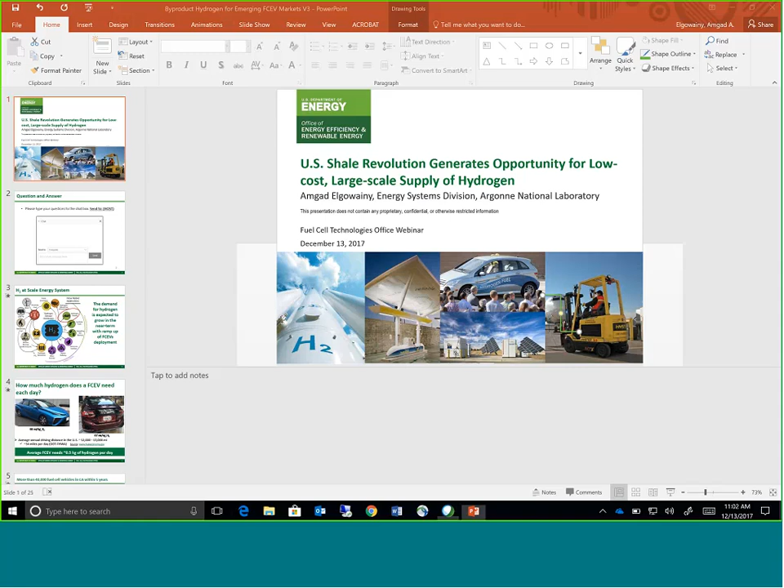All right, take it away, Amgad. Thank you, Neha, and thank you, Eric. Should I share my screen? Yes, go ahead. Can you see my screen now? Yep, go ahead.

Okay, hello everyone, this is Amgad Elgowainy. Today my presentation is about a near-term opportunity for low-cost hydrogen that could serve the early market demands of hydrogen. In particular, I will focus on the emerging demand of fuel cell electric vehicles.

To put it in context, I'm not sure if some of you have heard before about the H2 at Scale initiative. Dr. Bryan Pivovar a year ago presented in this webinar the Hydrogen at Scale initiative and the concept there. I will provide a brief introduction here, but dive into the topic of the presentation.

Hydrogen at Scale, as you see in this graph, tries to provide synergy across sectors. On the left, you see the power sector, which would be in the future dominated by renewables, but also nuclear power in the U.S. is important, about 20% in the grid mix today. Electrons produced by renewable and nuclear can be used in low temperature or high temperature electrolysis to produce hydrogen molecules, which can then serve different applications.

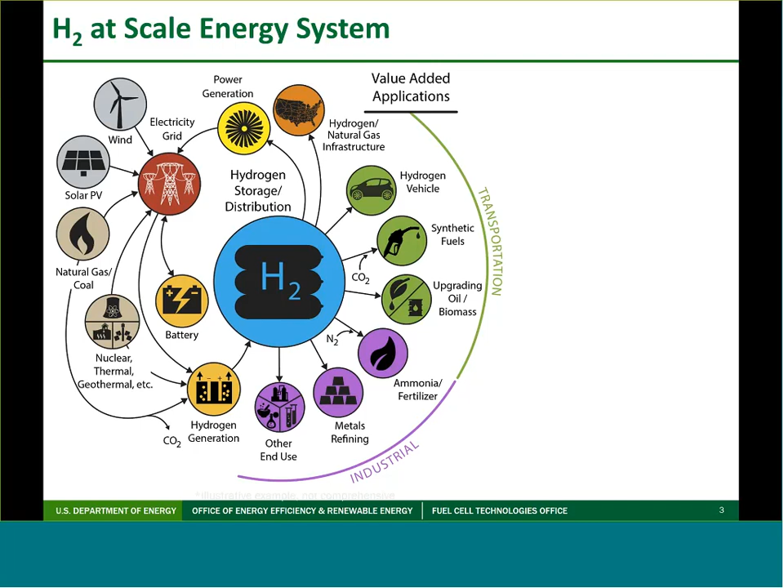So my focus will be on hydrogen fuel cell vehicles. The demand is expected to grow in the near term, especially in California, and then the zero-emission vehicle states in the northeast of the United States. And as the vehicles ramp up, there will be growing demand for the molecule.

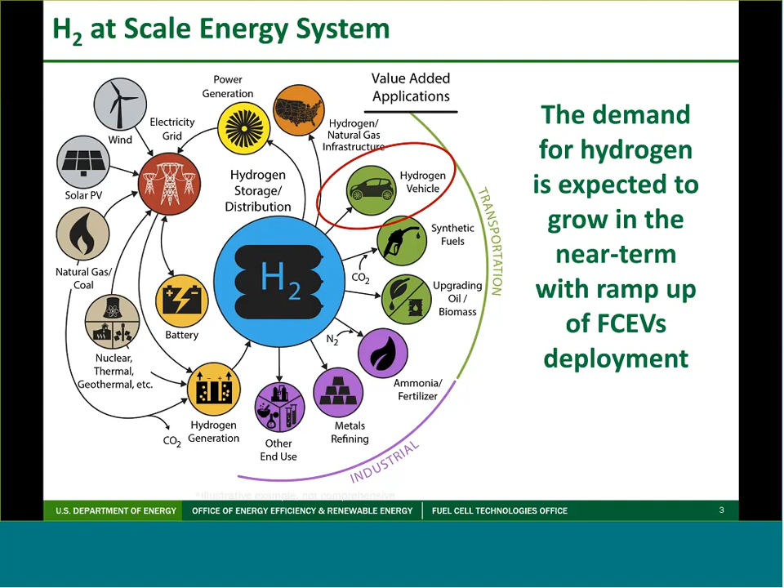Vehicles are being deployed today, and here I put a couple of vehicles that are in the market today. On the left, you see the Toyota Mirai, rated at 66 miles per kilogram of hydrogen in the U.S. driving cycle. On the right, you see the Honda Clarity, rated similarly at 67 miles per kilogram of hydrogen. Typical driving distance in the U.S. annually is somewhere between 12 to 13,000 miles, and on average a driver will drive a vehicle roughly 34 miles a day. Looking at the fuel economy, 34 or 33 miles requires roughly half a kilogram per day.

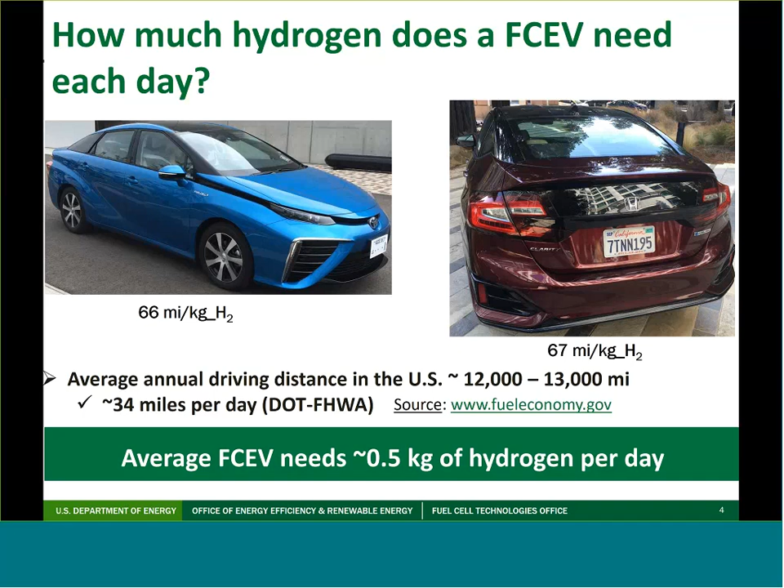So if we understand the market penetration of fuel cell vehicles, we can calculate the market demand for a given vehicle scenario. In California, for example, you will see the projected increase in fuel cell electric vehicle deployment, and within a 5-year time frame, the projection is somewhere between 40 and 50,000 vehicles on the road. Considering half a kilogram per vehicle, then we are talking roughly about 20 to 25 tons per day of hydrogen will be required in California alone within a 5-year time frame.

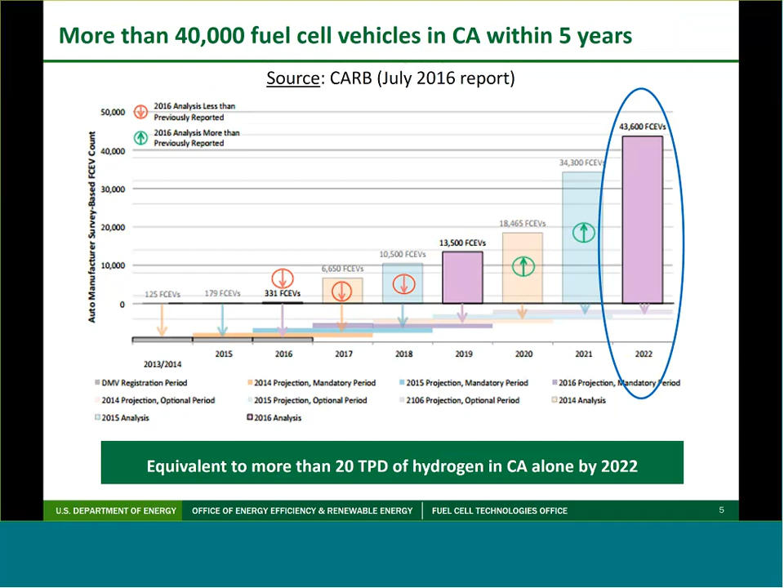This will lead to an important question: where will the hydrogen come from? 20 tons a day in a given market would need to be satisfied with certain conditions. So it is important to understand where the hydrogen will come from and to look at opportunities for a low-cost molecule that will serve that market in the near term.

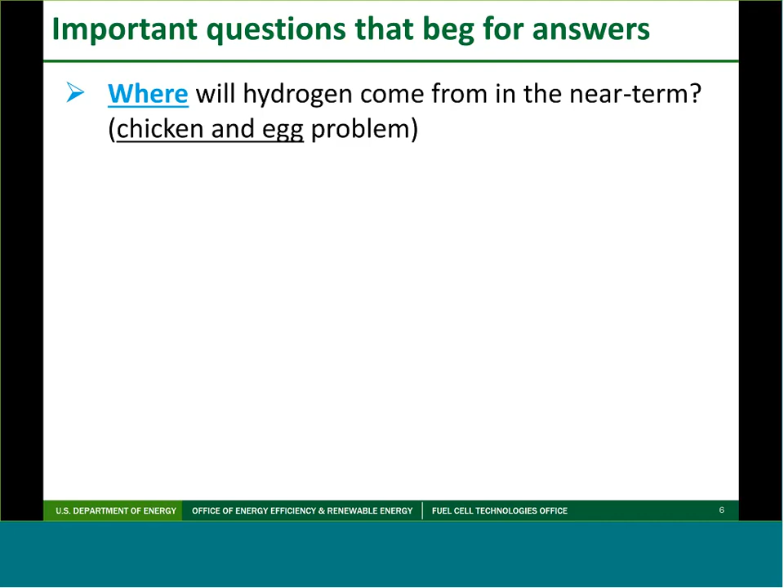The idea is to look for some source of hydrogen that is near term. Of course, we understand that the future is for renewable hydrogen, from zero carbon sources such as solar, wind, and nuclear. But until we get there, and until the economics and market demand grow enough to make these technologies economical, we need something near term today that can serve these markets.

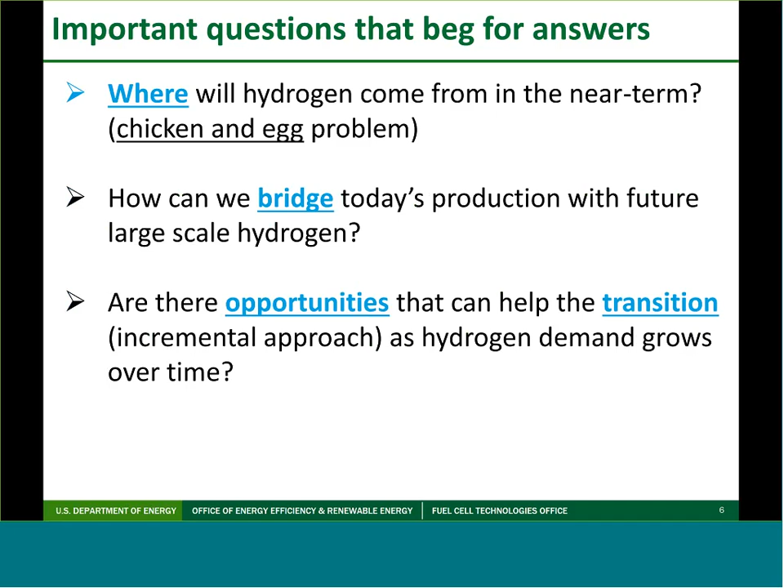So are there opportunities that can help with the transition as we ramp up the demand? This is the question we are trying to answer today, and how this might enable energy security within the United States, and promote hydrogen as an energy carrier, not only to serve the vehicle market, but to serve across sectors.

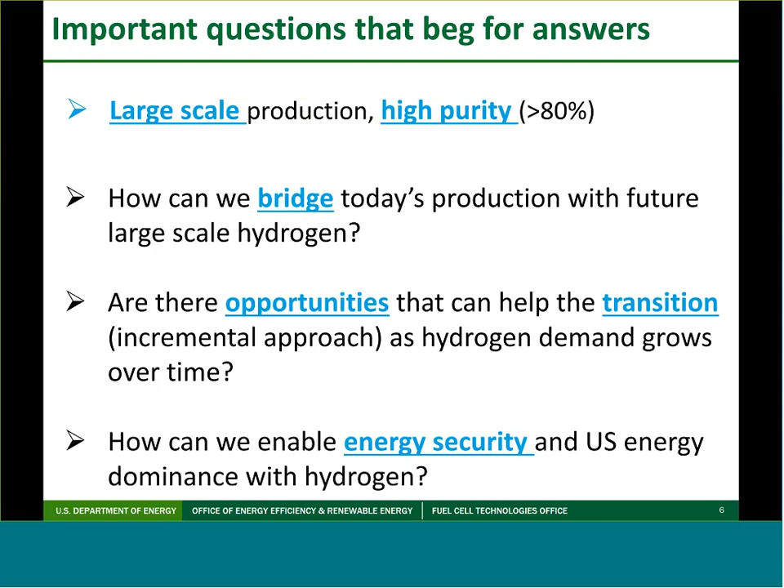So what will be the requirement of a near-term hydrogen supply source? First, we need the scale. We just talked about California, within 5 years, 20 tons a day. We also need the hydrogen to be produced in high purity form, and here I put greater than 80%.

80% is what we get from an SMR before the PSA purification. So if we get that high purity stream, then it will be economic to put a PSA unit to purify the hydrogen and supply hydrogen purity consistent with the requirement of fuel cell electric vehicles.

We also need, in the near term, to avoid large capital investment, to minimize the risk of investment. Lower capital investment would result in lower cost molecules. And we would like to make sure that we can produce a molecule competitive with the SMR cost today.

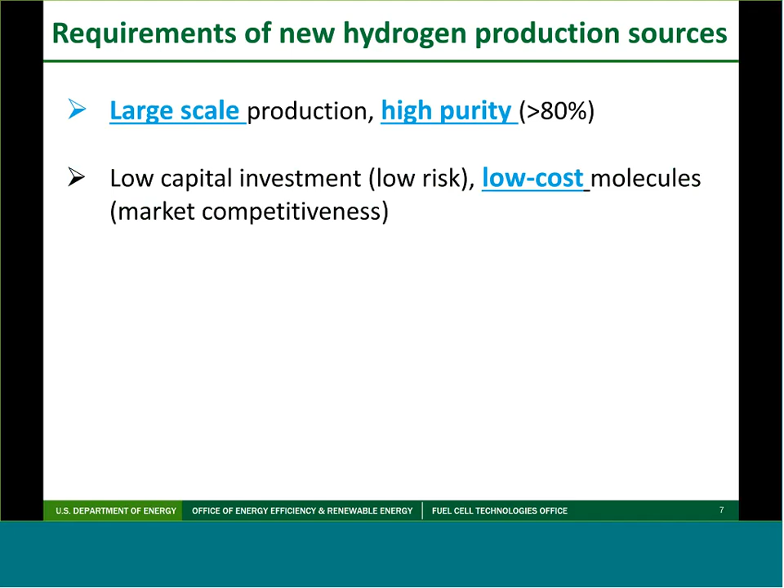We also want the molecule to be near the demand sites, whether it is on the West, California, or the Northeast. So the proximity of supply and demand will minimize the transportation cost.

And finally, we need the molecule at least to be at par with hydrogen from steam methane reforming or better, and therefore we could leverage some of the incentives provided for low carbon hydrogen.

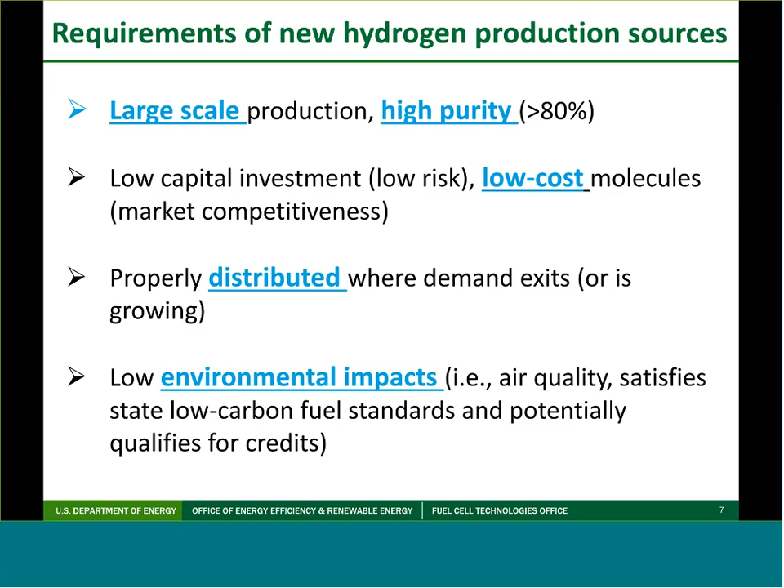So what are our options today to serve the early markets? One option is to build a new SMR plant in anticipation of market growth, and this could be at a large scale, central, or a small scale if the demand is low and localized.

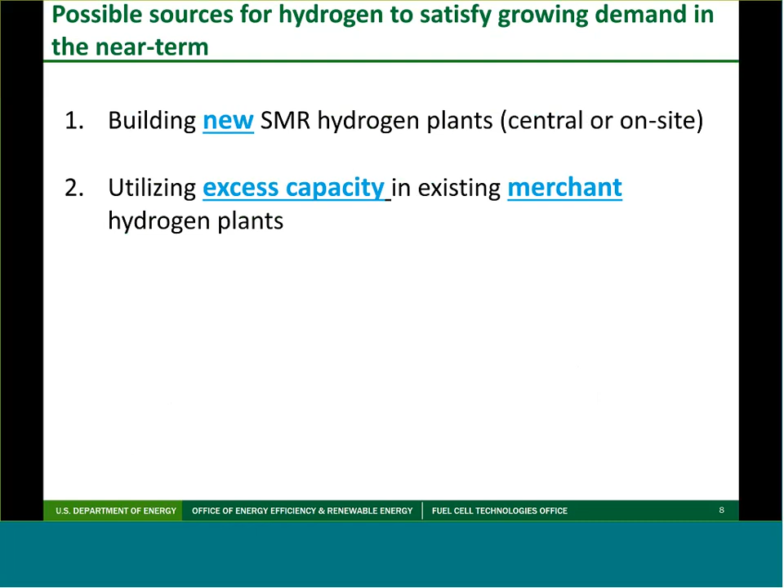Another option is to leverage some of the excess capacity, the marginal capacity existing today that is not being utilized in existing merchant plants across the U.S. We will shed some light on the capacity of these merchant plants, what the excess capacity might amount to, and the potential for that merchant market.

And then really the core of this presentation is to explore the stranded byproduct hydrogen in existing industrial and chemical plants. I will provide some quantitative numbers about the amount and the location of these potential hydrogen supply sources.

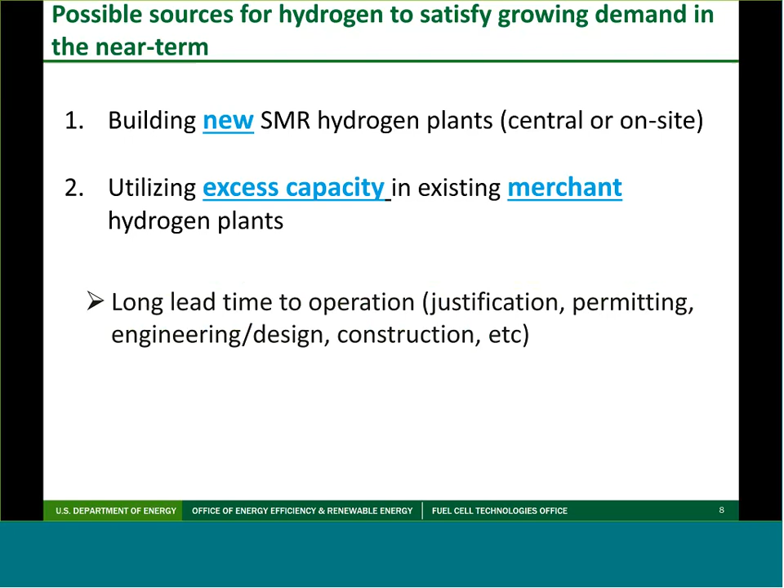So let us first eliminate some of these options. In the near term, building very large SMR plants, 20 to 100 or 200 tons per day, requires significant investments, hundreds of millions of dollars.

And to invest in such a project, you would require significant demand, and also you would like some certainty of the demand and longer-term contracts, which does not exist in the current market in California or other states.

These plants also require long lead time to build and operate, to justify the investment, to get permitting, to design, construct, and put in place. So in the near term, this is not a viable option — and by near term here, I mean the next 5 years, 5 to 10 years.

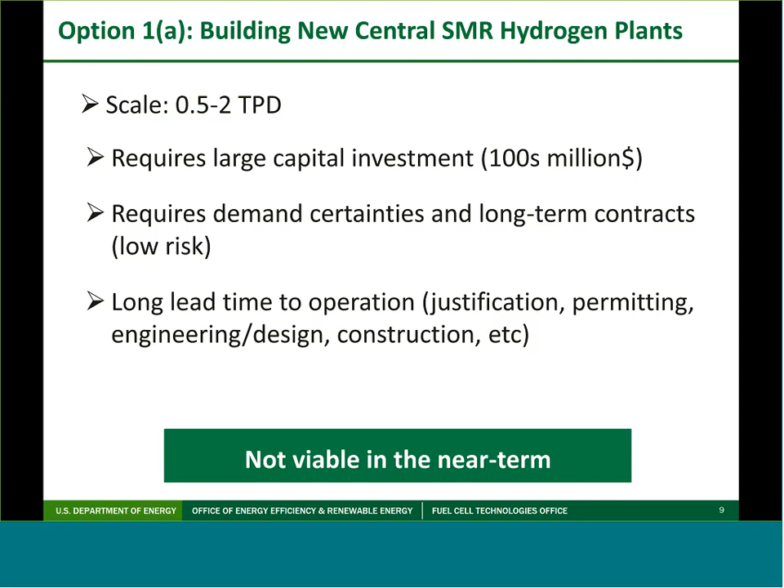So absent a large-scale plant, maybe a good option will be to build a small plant that satisfies local demand — what we call distributed production or on-site production — at a scale consistent with the demand, maybe half a ton a day, maybe 2 tons a day, depending on demand.

This may be appropriate for a fleet operation, for example a fuel cell bus fleet, where you may have consistent demand and you have the land area, and you could depreciate your investment over the service of the buses provided over the years.

However, this might not be as viable for a fuel cell light-duty vehicle market, simply because you shift the burden of capital investment to the station operator, who are usually small investors and risk-averse.

Furthermore, you are adding capital which will be underutilized in the near term, because these stations are not fully utilized as vehicles are being deployed gradually over the years. So the economics will not work.

In addition, you will need significant footprint to install the on-site equipment. You will need purification, you may need power upgrades. And all of these will deter that from being a viable option, absent a few applications, as I mentioned, such as fleet operators.

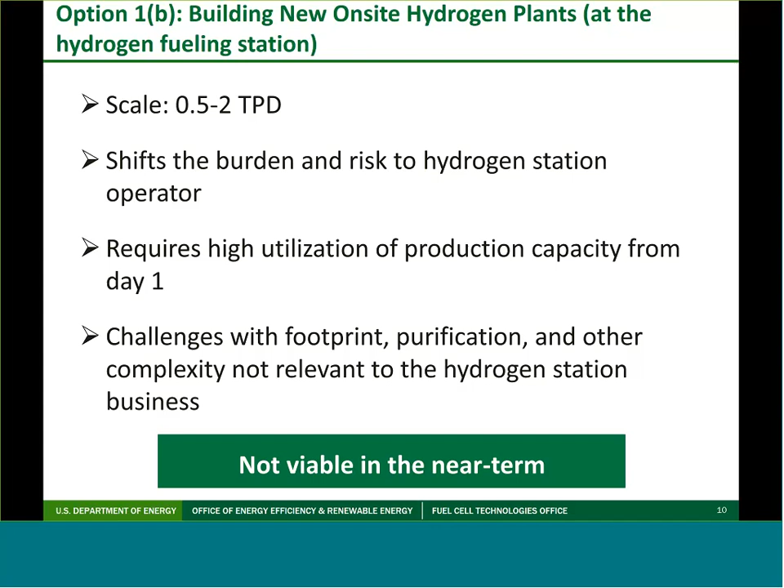So this is of limited viability in the near term as well.

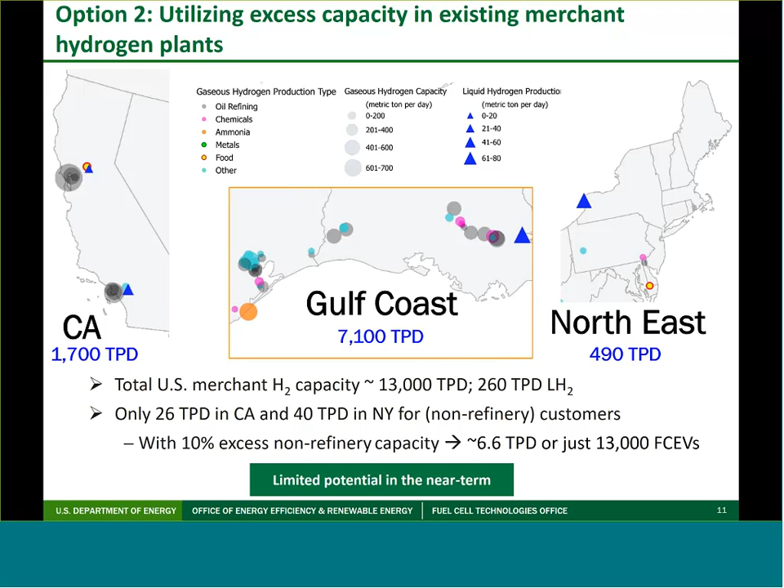So this has limited potential in the near term.

What we are proposing here is that there is significant production of hydrogen that is being stranded in industrial operations. I'll show 2 examples. The first is chlorine plants. Chlorine plants produce roughly 1 million kilograms, or 1,000 tons a day, of hydrogen. This alone can fuel 2 million fuel cell vehicles. Here you see the chloroalkali process, where you use electricity, mainly electrolysis, to separate the chlorine and produce hydrogen.

That hydrogen has several uses. Roughly half of it goes to the merchant market, which is the best use of the hydrogen molecule. In other cases where there's no market, it's combusted for process heat, roughly 30 to 40%. About 10 to 20% is being vented. If we consider 10% vented hydrogen of the 1,000 tons per day, that's about 100 tons per day, which can serve 200,000 fuel cell vehicles in the very near term. This is very high purity hydrogen, roughly 98 to 99% purity.

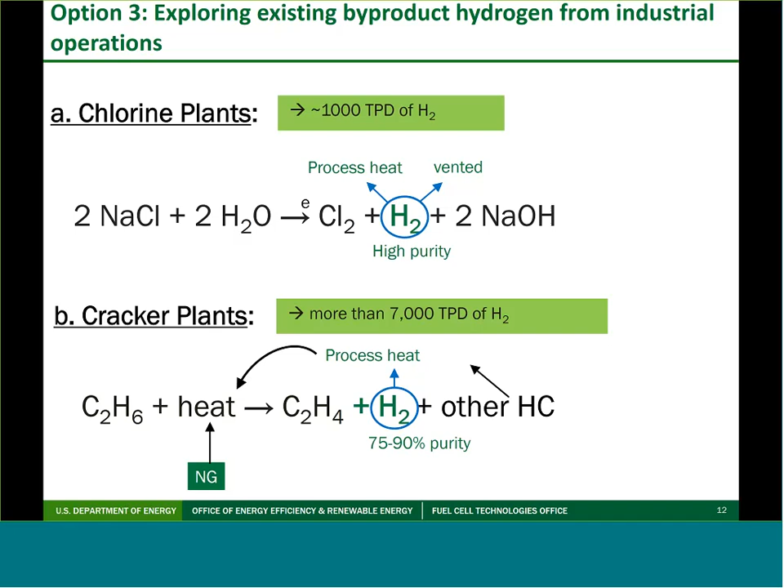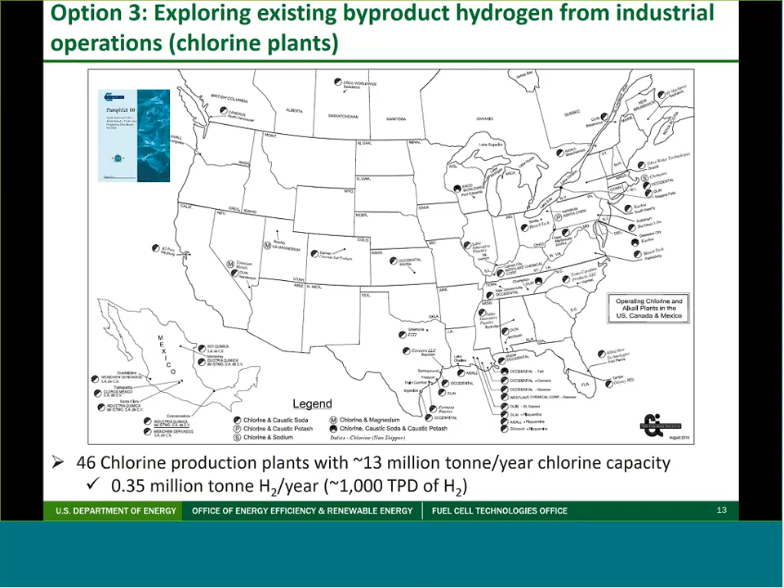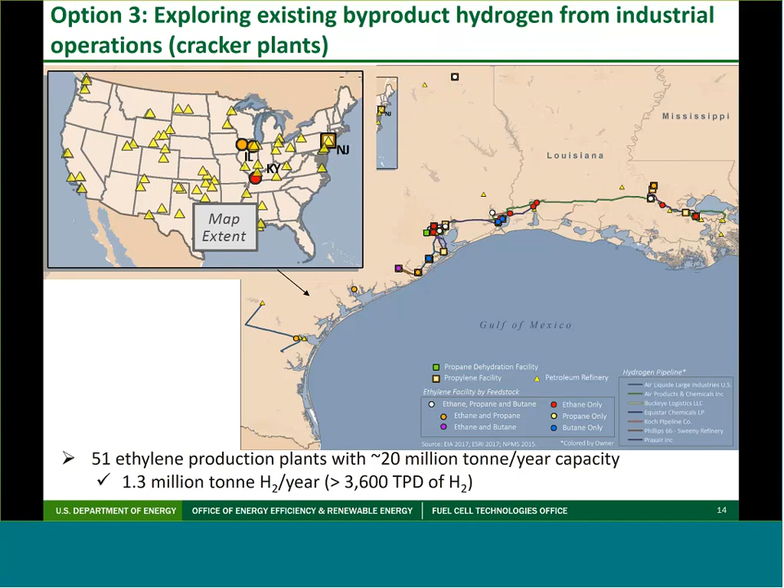And this is, again, a high purity hydrogen. It is being stranded, it is being combusted. Hydrogen has much higher value than its thermal value. As we know, we can compensate the thermal value with low-cost, cheap natural gas. And the hydrogen can serve a bigger role in fuel cell vehicles where you can get the efficiency. So the proposal here is to make use of this stranded asset in a more energy efficient way, as we have seen before, fuel cell vehicles are at least twice as efficient as the fossil counterpart in internal combustion engine vehicles.

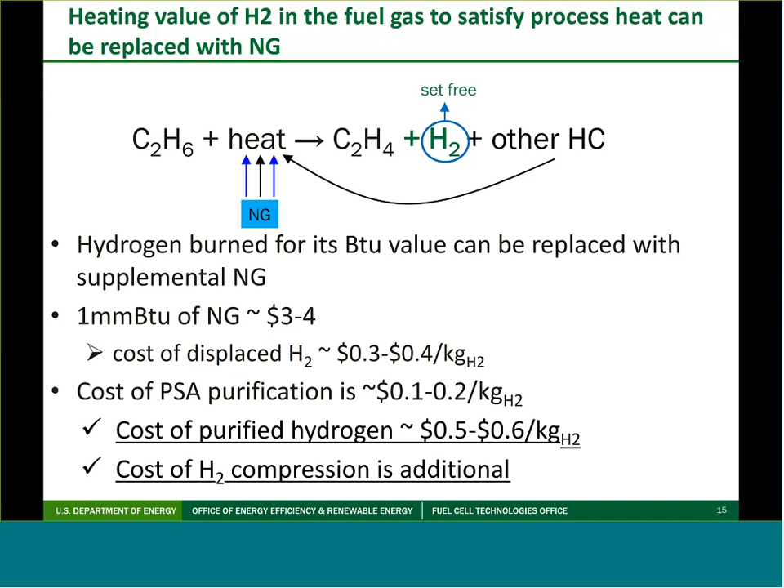We spoke with one of these cracker plants. We said, why do you not sell the hydrogen for a bigger value? They said there is no market for it. Where these plants exist, they don't see a big demand for hydrogen.

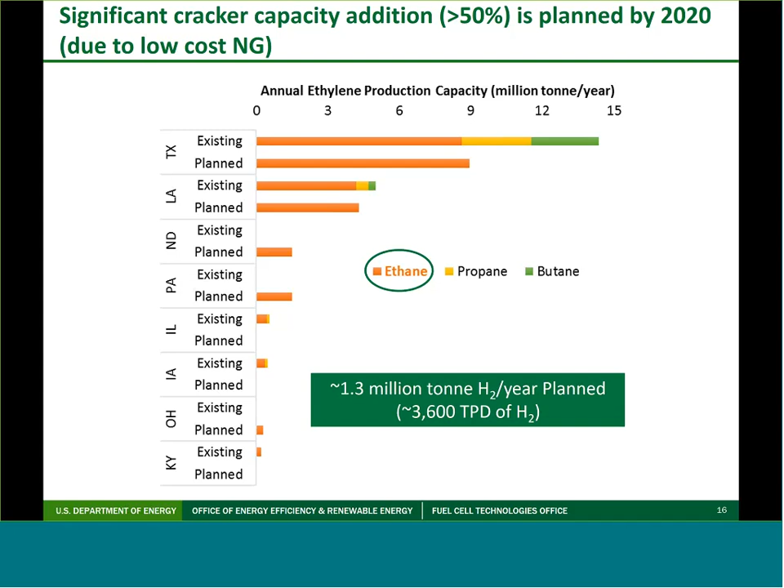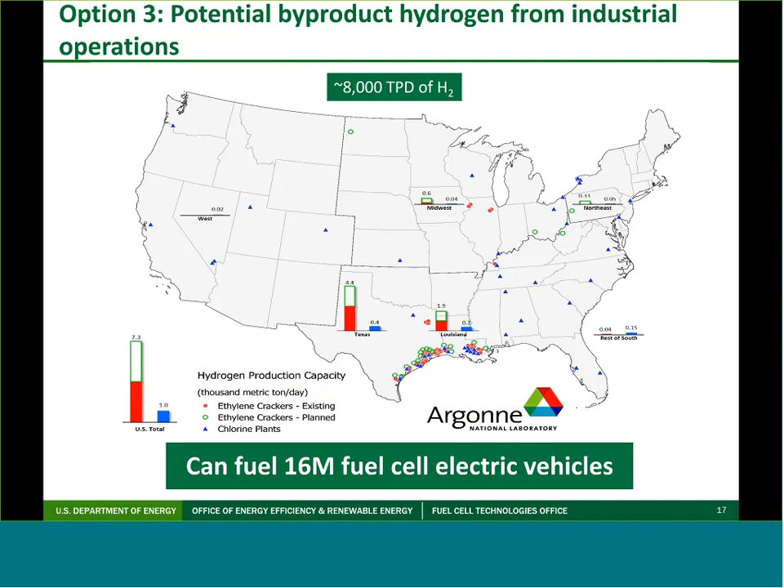This chart will combine the cracker plants existing and planned, and will also show the chlorine plants. Combined, they have the potential of 8,000 metric tons per day of hydrogen. Again, this can serve millions of vehicles - over 15 million fuel cell vehicles could be served just by these stranded hydrogen assets. And again, this is a larger scale, low cost, requires small capital investment, and is fairly distributed.

How about the environmental impact of that? We know SMR is at best 70% today, lower heating value-based efficiency. So for each hydrogen BTU of heating value, you need to consume roughly 1.5 BTUs of natural gas. Now the cracker plants will just displace a BTU as a BTU, as if it is 100% efficient. That efficiency gain will make the carbon footprint of hydrogen from the cracker plants 30% less than SMR.

And remember that we crack fossil feedstock, in this case ethane or butane or propane. But the carbon we bring from the ground, we do not release in the air - it is locked in the product, the chemical feedstock, and the hydrogen is fairly zero carbon. However, because we compensate for the hydrogen with burning natural gas, we need to really burden that to the hydrogen, the amount of natural gas for a thermal BTU.

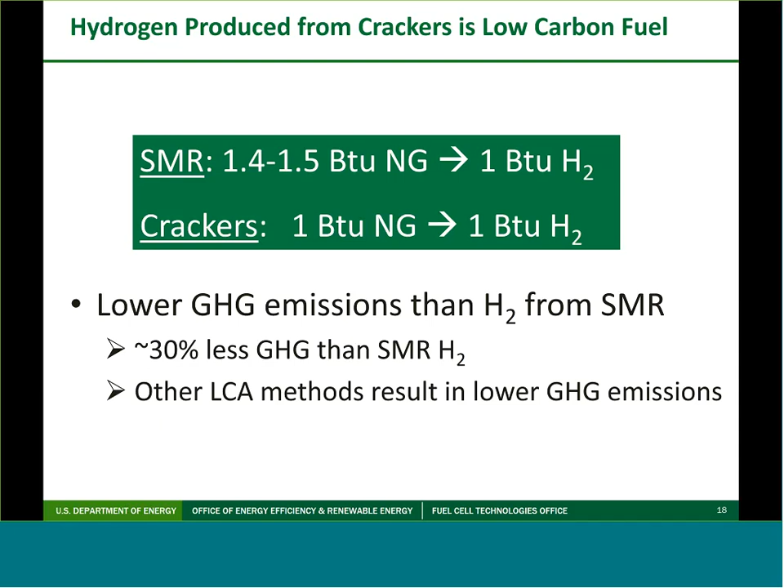But all in all, it is lower carbon footprint compared to the SMR, at least 30%. In some cases it could be more - for example, you will see cracker plants can provide 25% to 30%. It depends really on how much compression and how much purification you may need. But if the hydrogen is vented and you make use of it, then it is a zero carbon molecule, and you may have a small penalty from compression, for example. And this is why you'll see a larger reduction if you could leverage and utilize some of the hydrogen that is being vented today.

This slide shows the value of low carbon hydrogen. I borrowed this from an ARB presentation back in 2016, last year, by Sam Wade.

Some of these values are proposed but calculated based on the carbon reduction potential. On the far right, you'll see the SMR - even a fossil source of hydrogen generates credits under the low carbon fuel standards in California. You'll see $1.6 a kilogram credit for gaseous hydrogen, and over $1 for liquid hydrogen. This is all at $100 per metric ton of CO2, which was really the average price in 2016, as you see in the table above.

The credit prices kept going up from 2014 to 2015 to 2016, so at a higher price you get higher credits. If the SMR can generate $1.6, then hydrogen from the cracker plants can produce $2 because it is even lower carbon. If it's a $2 credit while it costs you $1, then you could make money. Of course the transportation cost is big and the refueling cost is big, but you could offset some of the transportation costs with the credits you could generate in a market like California.

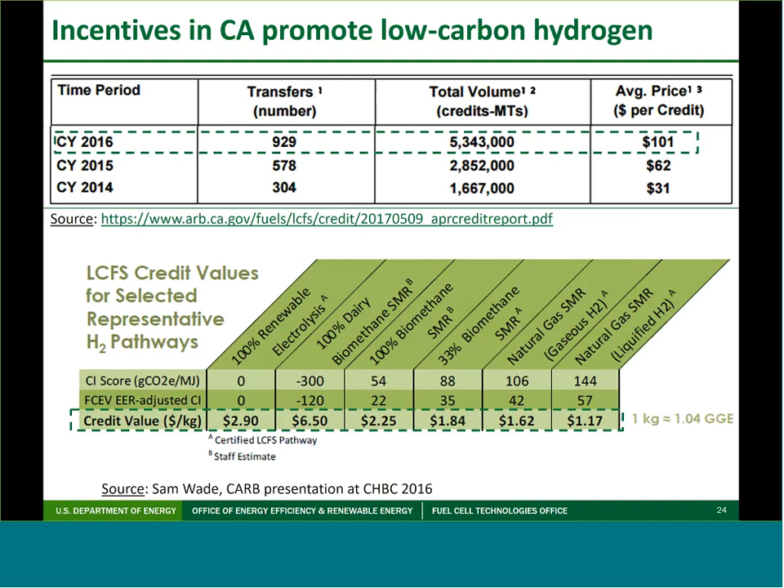Okay, another question was on slide 19, so I think we can scroll back to that slide. What carbon emissions are you assuming supplies power to the chlor-alkali plants?

So the power - I mean, the chlor-alkali plants have different technologies for producing the chlorine, and both of them use electricity. However, what I did here - you have different methods to allocate the energy and the emissions between the co-products.

The most conservative one, to give credit to the hydrogen, is to say: well, after I produce the hydrogen, I use it for its thermal value. So what if I displace the hydrogen with natural gas, then I burden the hydrogen with natural gas that is compensating for the hydrogen loss.

If I use a different life cycle analysis method, which really we do, then your carbon footprint will be much lower. So if I split the electricity use between the chlorine, the caustic soda, and the hydrogen, then the burden on hydrogen will be much smaller too. There are different methods of how you allocate, based on energy or based on mass, because roughly for each ton of chlorine, 3% of that will be the mass of co-product hydrogen. So when you allocate by mass or by energy, hydrogen receives very little burden.